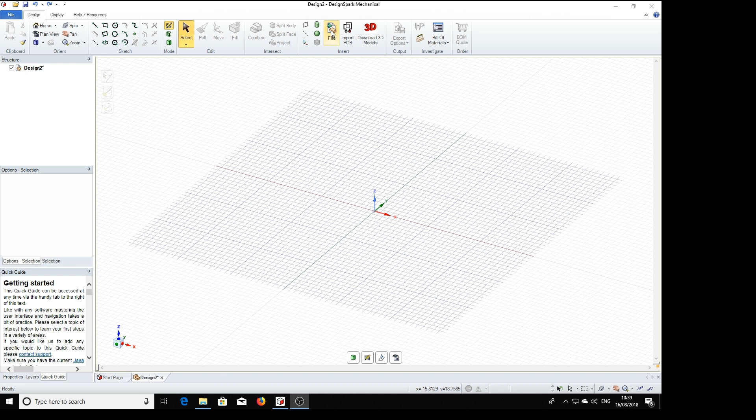So the tool we're going to use to import the various parts for the potentiometer is the file icon up here. If we access that, we're going to build everything onto the base insulator. So select base insulator.

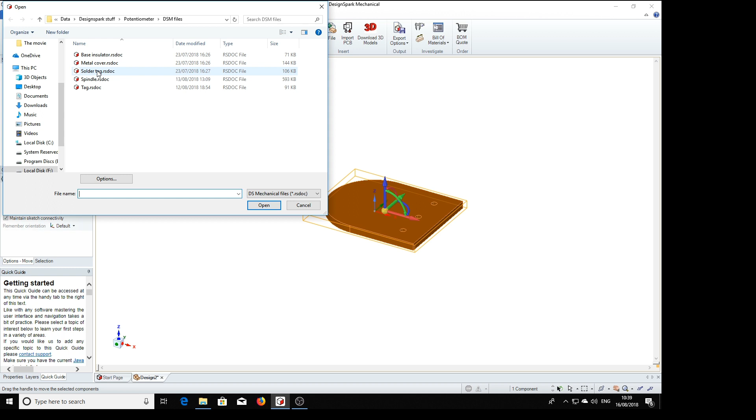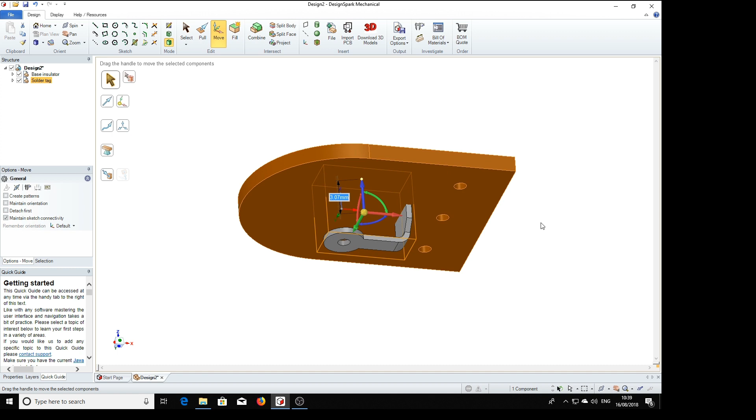There it is. And the first thing we're going to put on is, file menu again, the solder tag. Right there we have a solder tag. It's embedded in the thing, so we see underneath that it's embedded within the material. So what we'd like to do is just drag it out a bit so we can access this part of it. The first thing we'll do is align that hole with that hole.

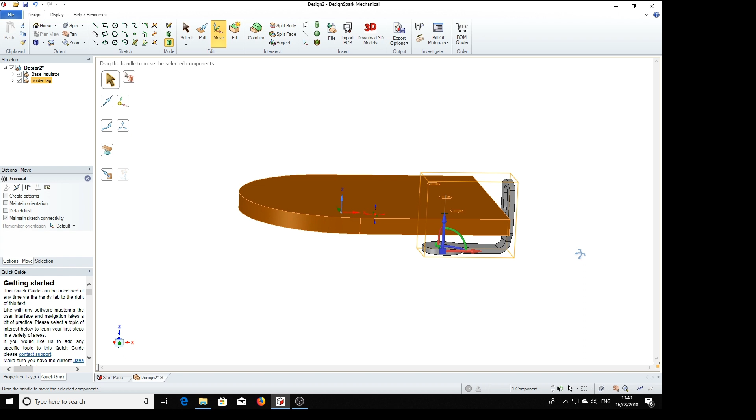So we drag the anchor point to the bore, then up to the bore of this one, and there you go. We've now got the thing in line, and it's a simple matter now to drag the anchor onto this face, then the up-to tool and click that face, and that's the first one positioned.

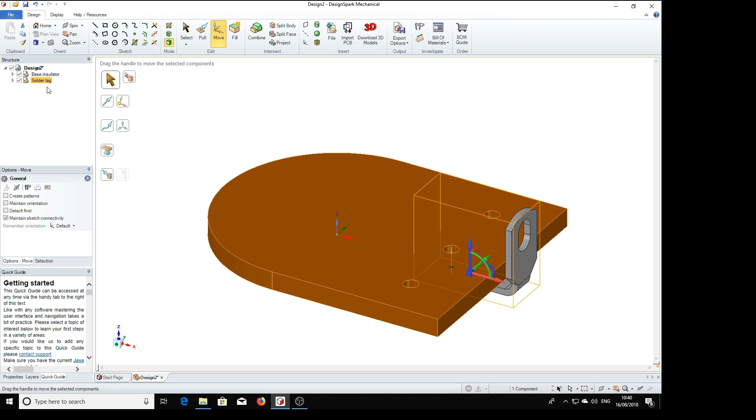We're going to make two more of these. So to make it look nice, we'll select the bottom view, and by holding the control key and dragging, make sure we've got that whole tag selected. Control key, drag. Now we've got to release: 5.08, which is 2/10 of an inch, return.

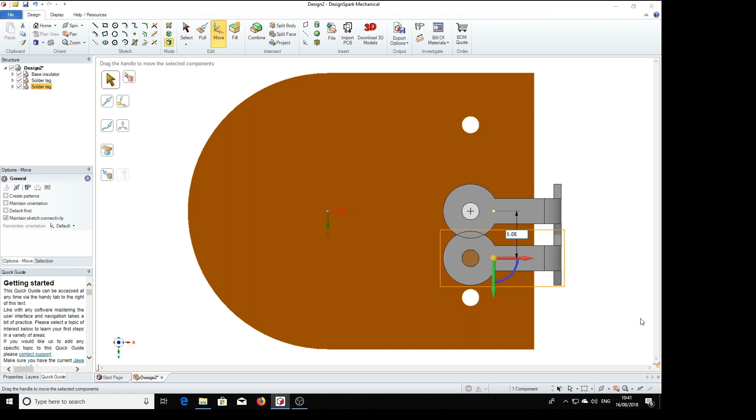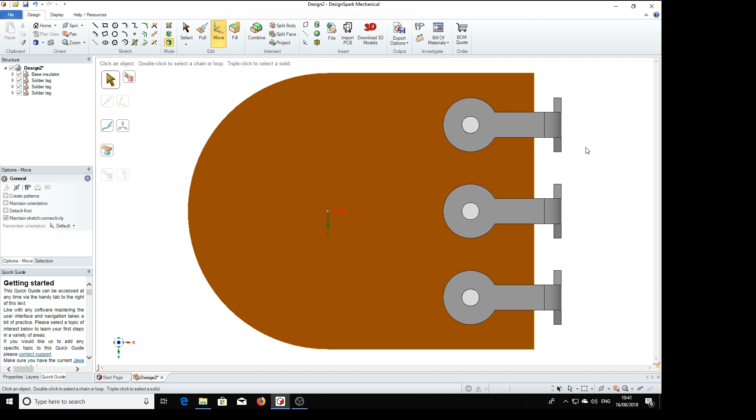Control key and drag again, release. We see we're measuring from here upwards, and so it's 5.08 again. Home key. There we have 3 tags.

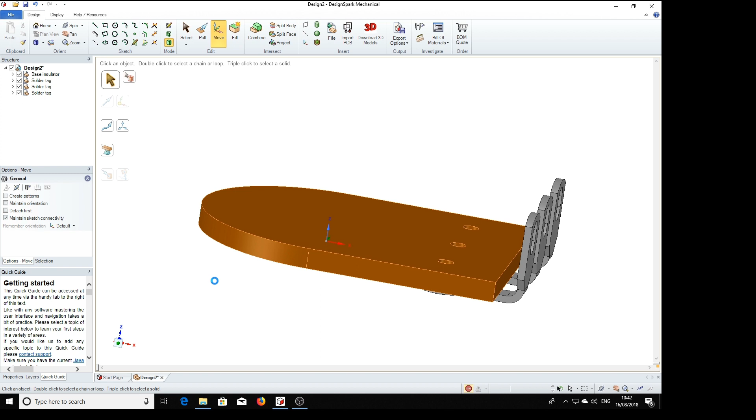Next we'll select the metal cover. Taking its time, there we are.

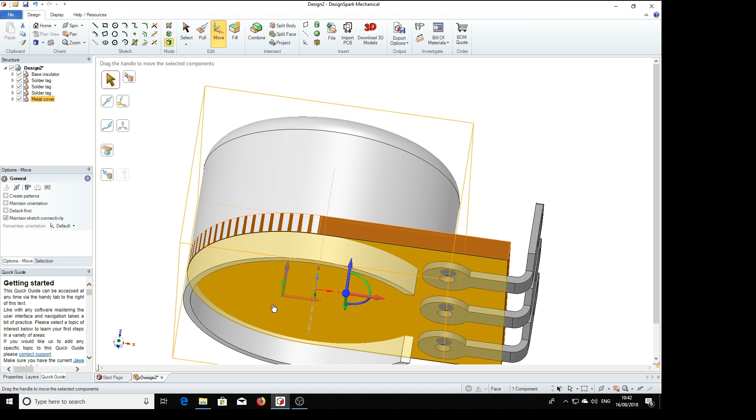Now this needs the bottom edge moved up to the top face of the insulator. So again we drag the hub of the anchor to that face. So up to tool, select the top face, that's that positioned.

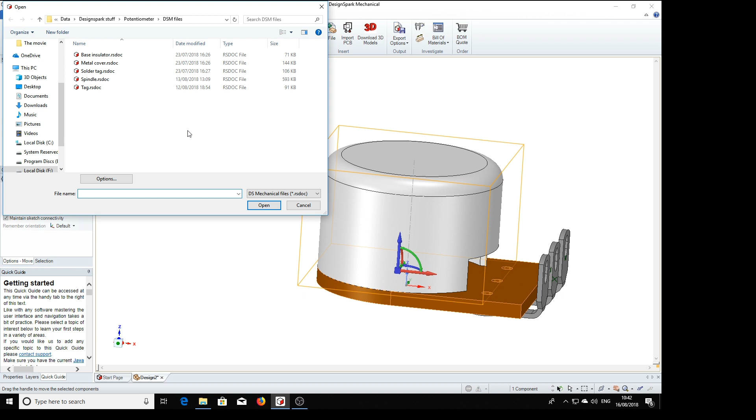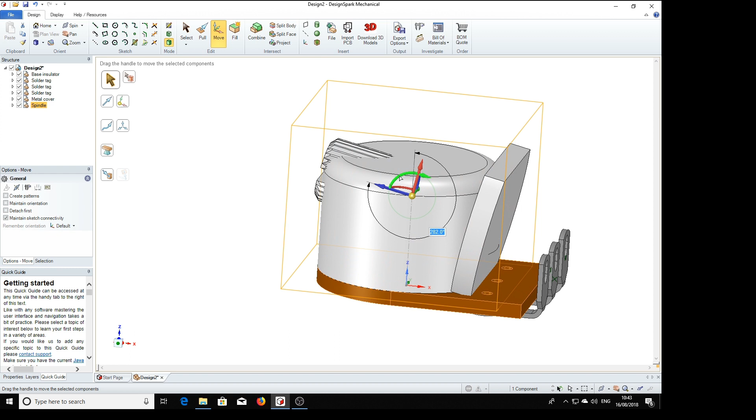Next item is the spindle. Taking a time, there you go. First thing we notice, of course, is that it's upside down. This knurled part should be pointing the other way, so we simply drag it round. Looks like it's going to be 180 degrees, so we'll type 180.

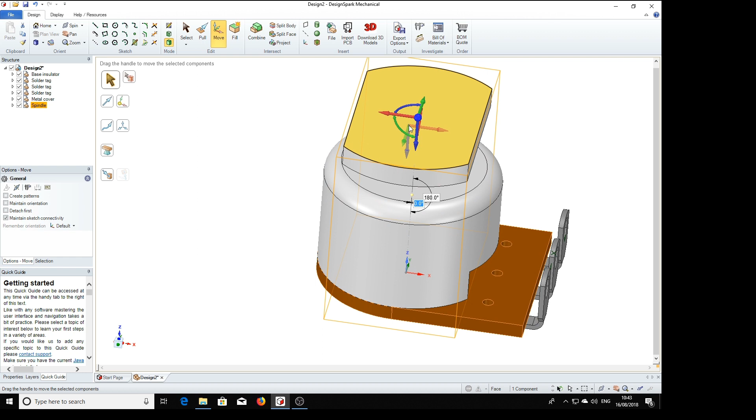And we want that face to sit on this face down here. So we drag the anchor to that face, up to this face, and would you believe, that's it.

There is the complete assembly before your very eyes. Well friends, that's the end of the potentiometer project. I hope you found it interesting and useful. There will be more to come, so stand by for more interesting DesignSpark Mechanical projects.